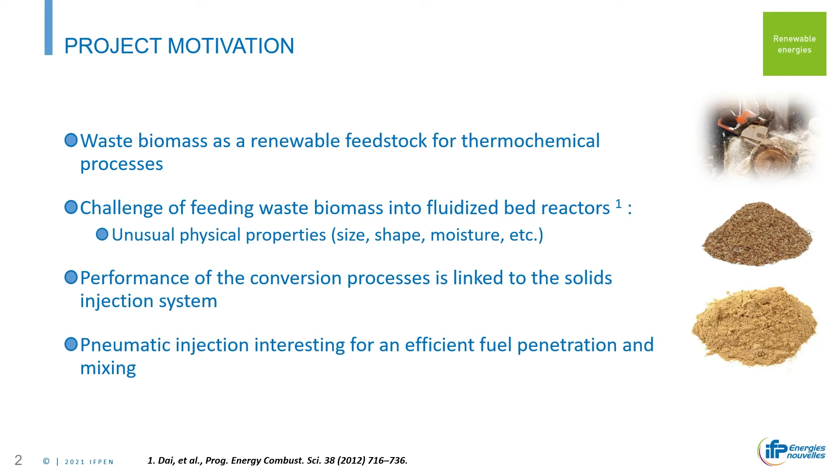For those of you who were here for the talk by Carl Jacob on pneumatic injection, that's an interesting way to inject biomass into fluidized beds. That was the motivation, and for that we built a pressurized pulsed feeder for pneumatic injection of a batch of biomass. This is of specific importance for studies where, for example, we want to do kinetic studies of combustion, gasification, or pyrolysis of biomass, and we need to inject just a batch of particles inside the unit in an efficient way.

Or when we do hydrodynamic studies in cold flow models, where we also need a tracer that we want to inject into the reactor in a batch mode. So we studied this for doing a hydrodynamic characterization of this kind of transport - pneumatic injection of batch biomass into the reactors.

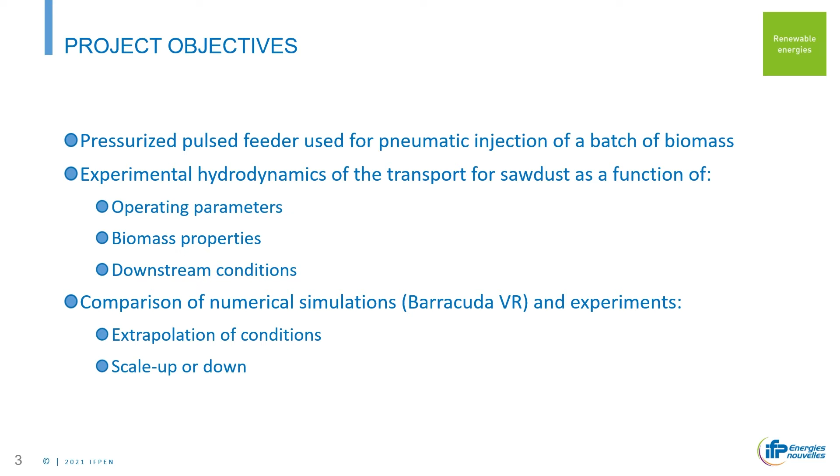We did some experimental hydrodynamics as part of the transport, and then we also did penetration studies. I'm just going to focus on the transport of this biomass; the penetration I may show in the future. So in this presentation, I'll first talk about the experimental part - how the transport of this sawdust is related to the operating parameters, biomass properties, and downstream conditions: is it a fixed or fluidized bed, or just an empty bed? Then the part I really like is the comparison between numerical and experimental results, and how we use these numerical simulations in Barracuda for extrapolation to other conditions, or scale-up or scale-down.

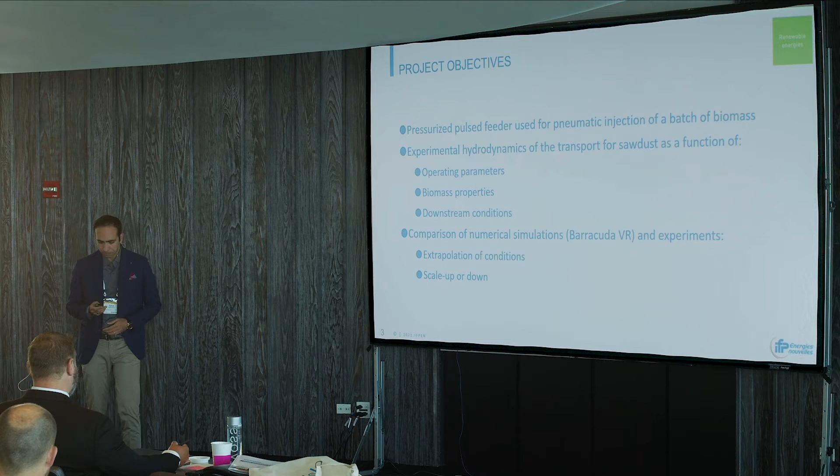We insert a certain amount of biomass, indicated by this packed bed with mass M. We use pressure to pressurize this part. Once we open the ball valve, the pressure built up here pushes this biomass into the main column, and we could also use secondary air injection. We placed a fast camera in this region to see the dynamics of the transport, and also to measure the time the biomass needs to get through.

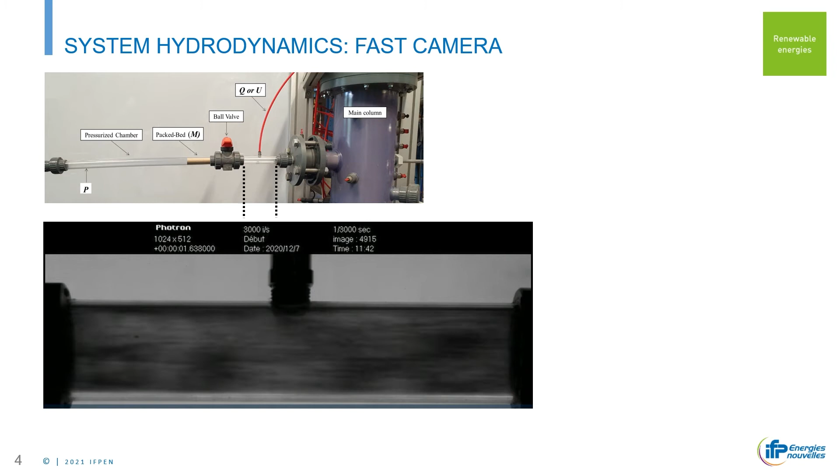Here's the video that we captured at 3,000 frames per second. You can see we've depicted different phenomena of this transport: a very dilute region, then more dense regions with some voids in them, and then a big plug of solids being transported here - that's where most of the biomass is actually being transported to the unit. The pressure initially accelerates the particles, but then there's a tail of particles that remain.

We can see the particles start decelerating here because the pressure is actually being balanced throughout the entire line. At a certain point, as you can see here, there are just a few particles remaining in the injection line. By considering this phenomena and doing some image analysis with our postdoc researcher, we were able to understand the time it took for the biomass to actually be transported and injected into the unit.

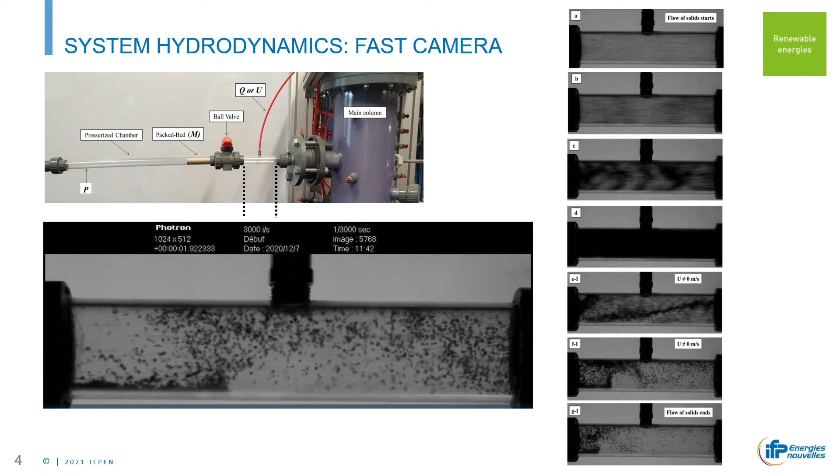And to get the solid mass flux, as you can see here, at a certain point, once the driving force is completely dissipated, the particles start doing some recirculation. At this point, we considered the transport finished, and we measured the remaining amount of biomass that was negligible, less than 1% of the initial mass.

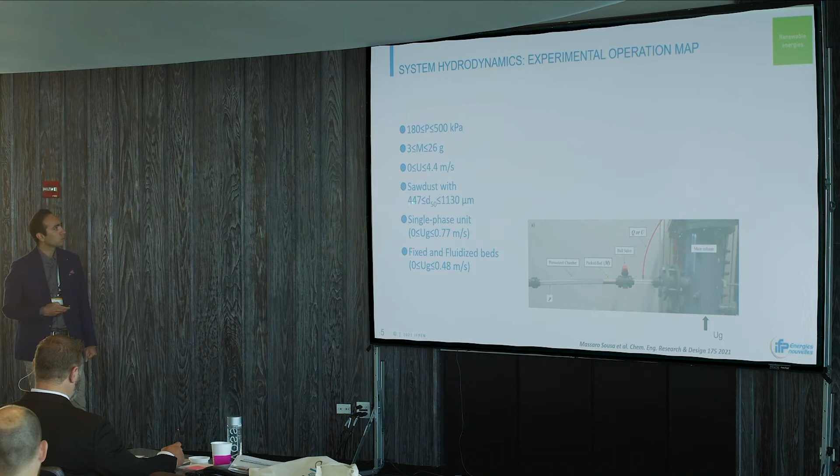So we did this, and then we started studying the experimental part with different operating conditions. We operated this chamber with pressures between 180 and 500 kilopascal, different masses of particles. We used or not the superficial gas velocity for the secondary injection to enhance the injection. We used different kinds of sawdust with D50 between 447 micron and 1,130 micron. We injected the biomass into a single phase unit just with air, or a fixed and fluidized bed with different superficial gas velocities.

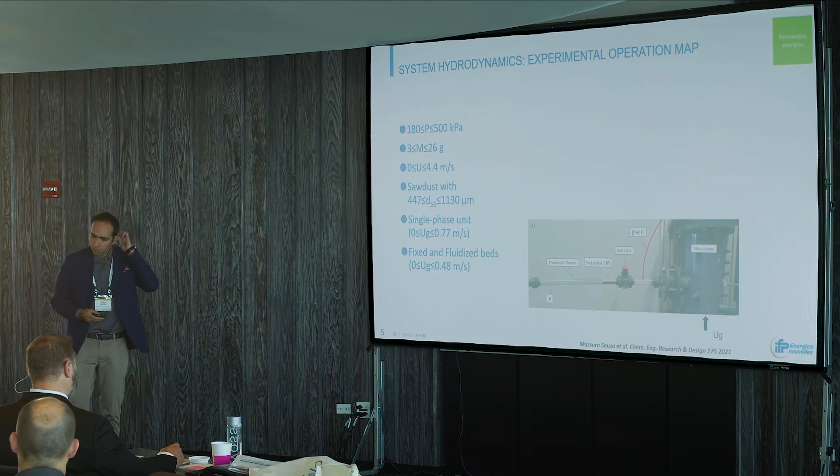This was done, and we published these dynamics in terms of hydrodynamics in this paper. We wanted to see, in all these operating conditions, what the operation map is. So what we've done here is to see this solid mass flux as a function of the amount of pressurized gas that we have. This VA that I'm showing here is an adimensional volume of pressurized gas that we use in this chamber.

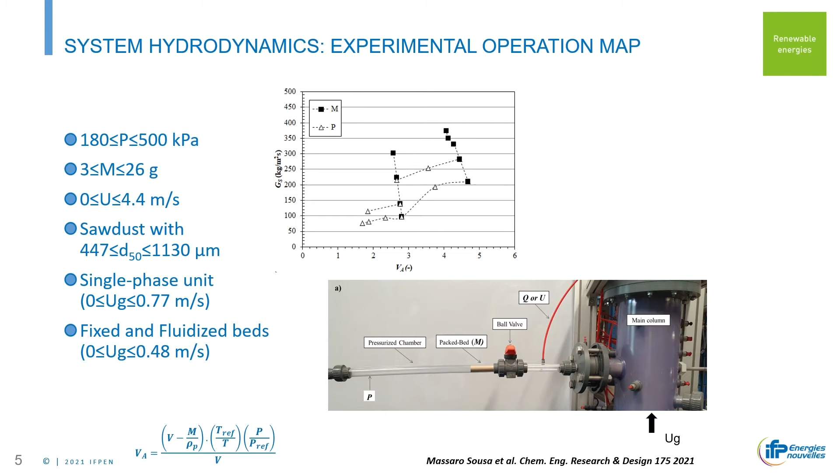Okay, so we can actually decrease or increase the solid mass flux in this unit by increasing the mass of solid inside this chamber. When we increase the mass of solid, the transport becomes a more dense transport, so the mass flux is higher. Or we can increase the pressure used for the transportation, which also increases the solid mass flux. So we came up with what we call the operation map with all these conditions.

We have several experiments that we have done at IFP, and there was the operation map where this feeder could be operated. That is region 1 that I'm showing here. The other regions, 2, 3, and 4, we could not operate.

The operation was jeopardized. In region 2, we could actually work, but for going to these high solid mass fluxes, we needed higher pressure, and we could not do it with this experimental rig. If the experimental rig was capable of higher pressures, we could actually go there. But in regions 3 and 4, we could not operate.

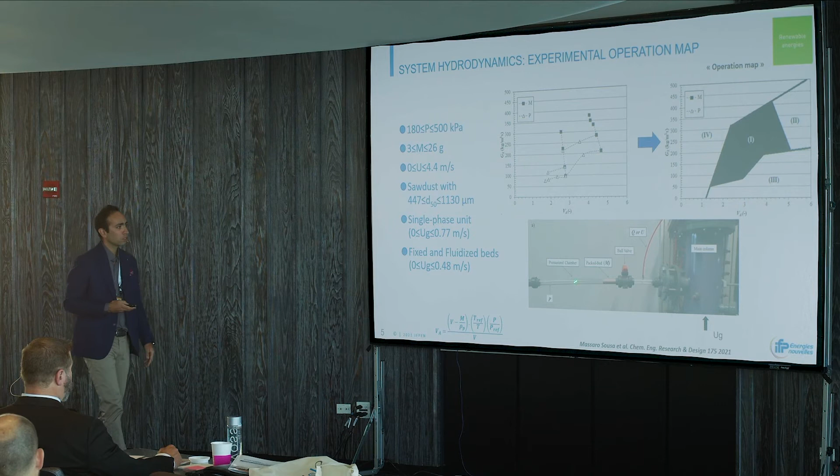In region 3, for decreasing the solid mass flux to that region, we needed a very tiny amount of biomass that was not feasible — it was very small, so experimentally it was not easy to transport. Region 4 was the opposite: it needed a very large amount of biomass in the system, and we know that when this piles up a lot, the interlocking between the particles doesn't let the pressure push them in, and transport was not possible. So once we did this, that was just the operation map.

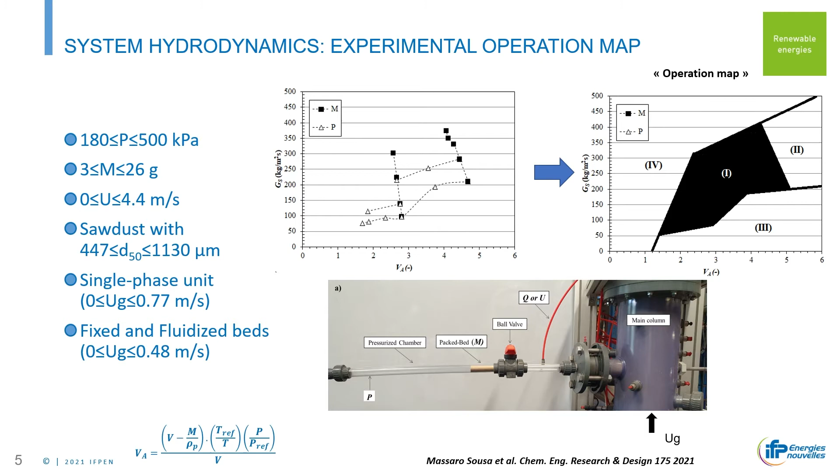We also studied and did some calibration to see how the transport works. Then we came to Barracuda and said, okay, let's see how the experiments compare with simulations.

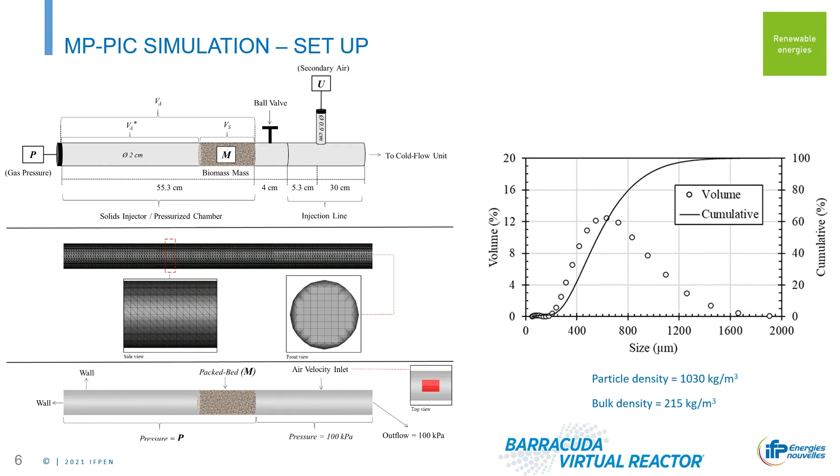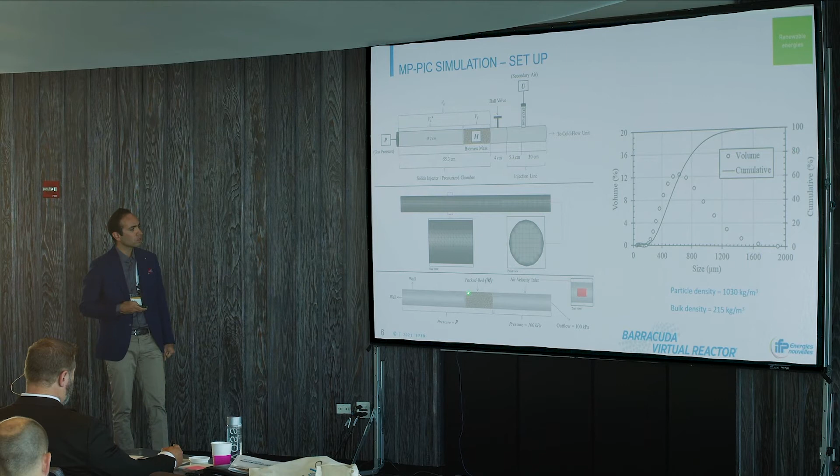So we did exactly the same, almost the same conditions that we had here. The only difference was the secondary air injection, which we put as a boundary condition, but the pressure, the pressure outlet, the amount of solid that we put for these physical properties was completely the same. So once we started, we chose this experimental condition that I'm showing here, and we started doing some mesh refining and selection of the different parameters. The first one was mesh refining.

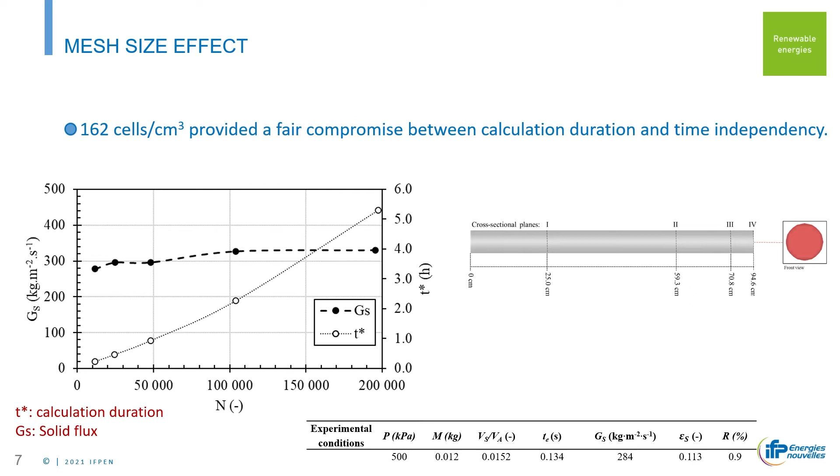Here I'm showing how by increasing the number of cells, the calculation time increases, but we were also interested to see if there is time independency of the solid mass flux. We chose 162 cells per cubic centimeter as the cell dimension in this region, which was a good compromise between calculation duration and time independency. We didn't want to refine it too much because we wanted to use the simulations for bigger scales too, and for bigger scales we wanted the cell size to not be very different from the smaller scale. So that's why we chose this, and started working on it.

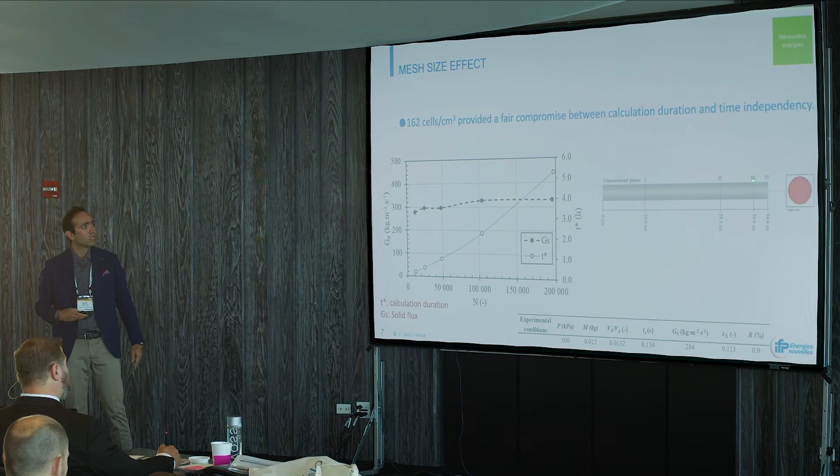The region where the fast camera was located, we placed a flux plane there to measure the time that the biomass was being injected, and also calculated it with the simulation. So that was where we could compare the time of passage from experiments to simulations.

Once we chose our cell size, we went to the main parameters that we usually use for tuning and verification of our model: the drag and particle-to-wall collision model.

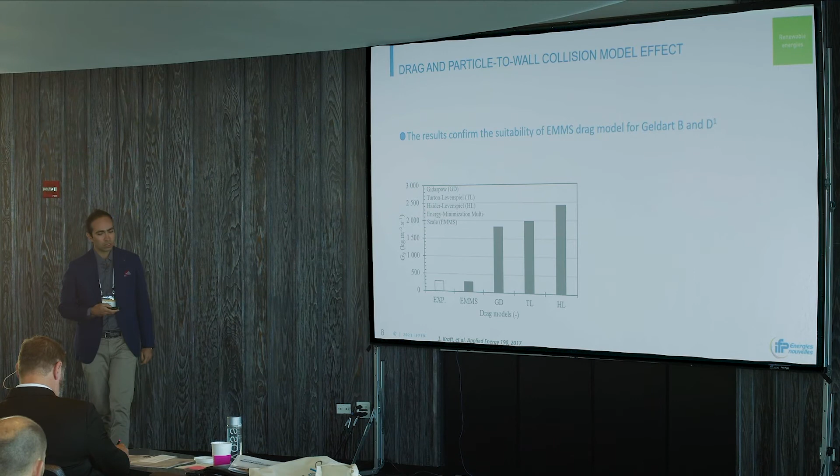For the drag, we used 4 different drag models: the Gidaspow model, Wen-Yu Ergun, Turton-Levenspiel, Haider-Levenspiel, and EMMS. As shown in other papers, EMMS for Geldart B and D particles works better than the others, and we saw that the experimental solid flux compared very well with the EMMS drag model. So that was the drag model we chose.

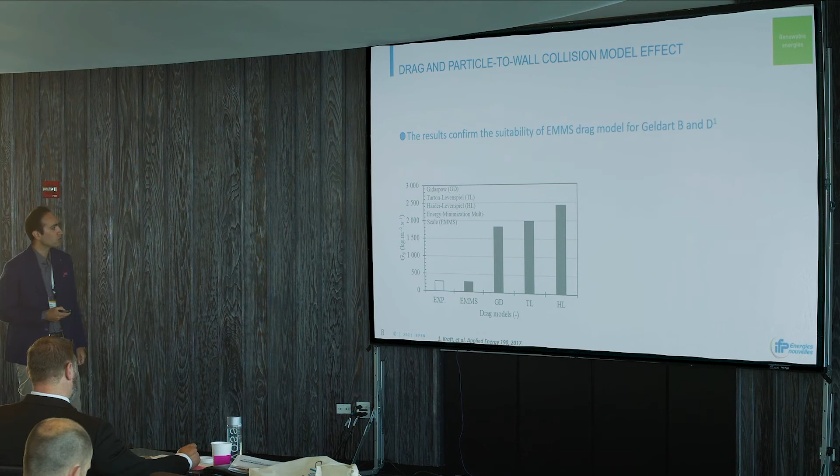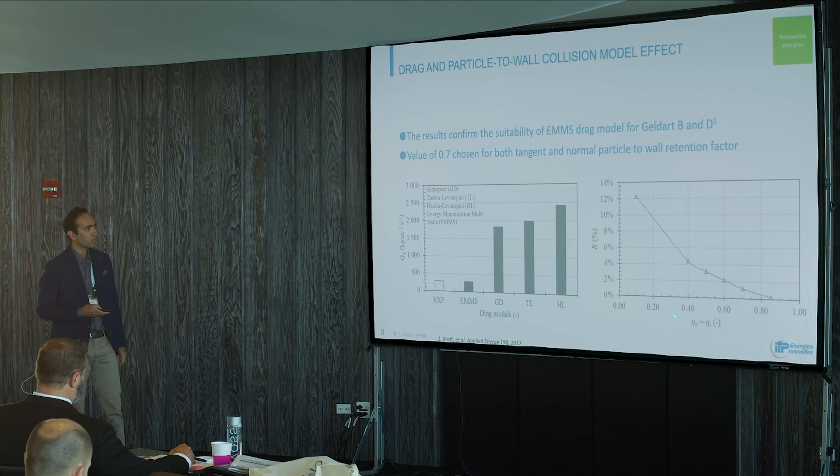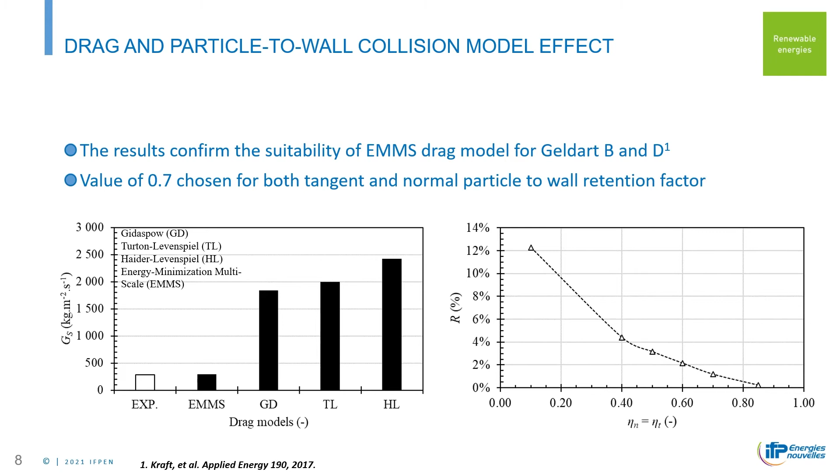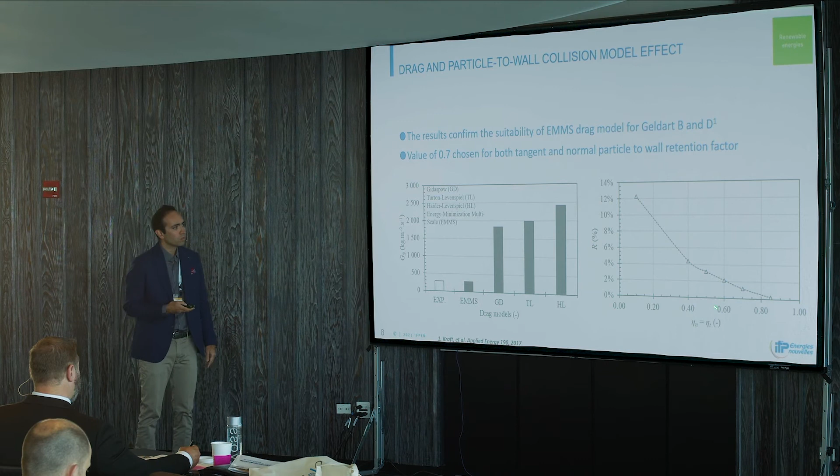Another parameter was the normal and tangential particle-to-wall retention factor, which we also wanted to optimize. This R is the percentage of solid that remains in the injection chamber once all the biomass is transported. Experimentally, we saw 0.9% of the initial amount remaining. When we decrease this parameter, it means we increase the friction between the wall and the particle, so more solid remains inside the unit. We chose a value of 0.7 that gave us satisfactory results.

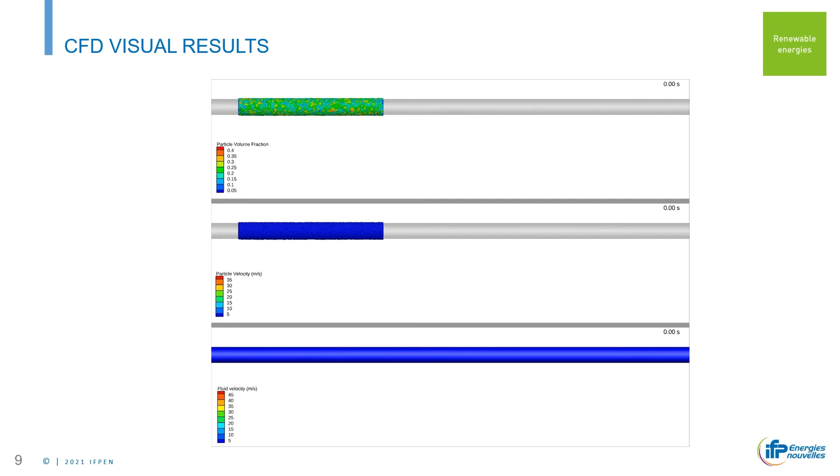Now let's look at the dynamics. This is similar to the fast camera footage I showed, but I'm going to show the transient contours of the CFD here. We have the continuous region colored by pressure, and the particles colored by their velocity. You can see the time scale is quite fast, between 0 and 0.3 seconds.

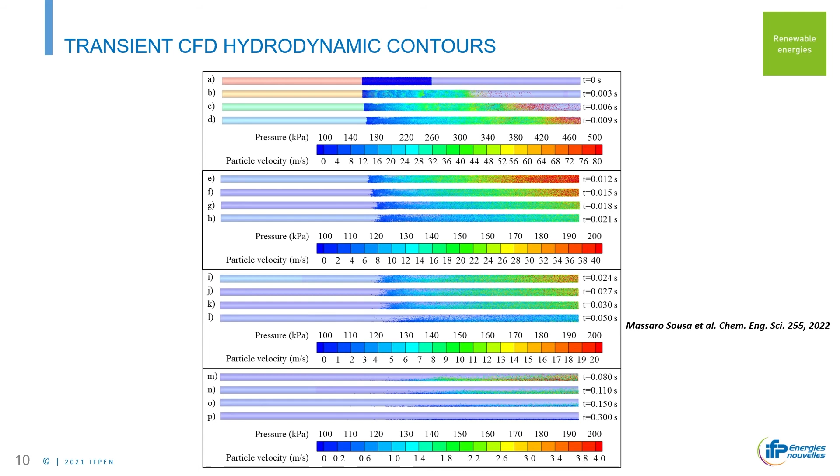We have most of the particles being pushed into the unit. At the beginning we have 500 kilopascal here, particles are not moving. The particles start getting accelerated here, and you can see the scale is 80 meters per second, so they're moving very fast. But at this time, the particles start decelerating because the pressure is getting much lower, and you can see the pressure scale is also decreasing.

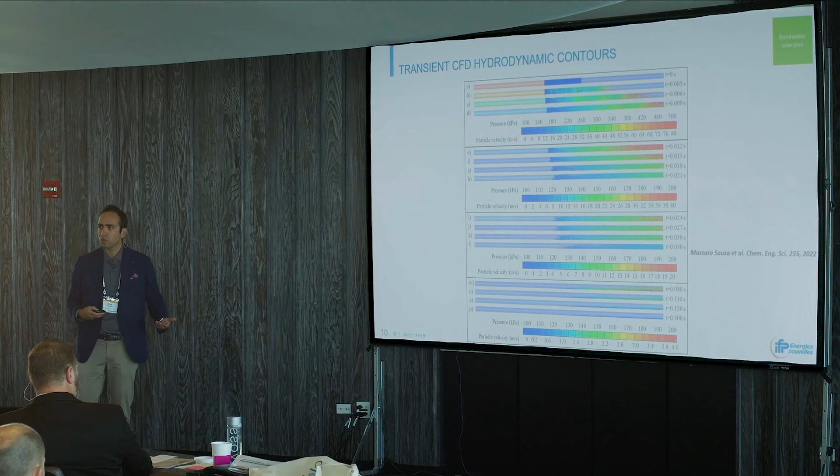We go down to 40, 200 here, and at the end we can see that when most of the particles are pushed out, there are just a little bit of particles remaining in the unit, and that's the remaining part that we measured and considered for comparison. We published this recently in Chemical Engineering Science.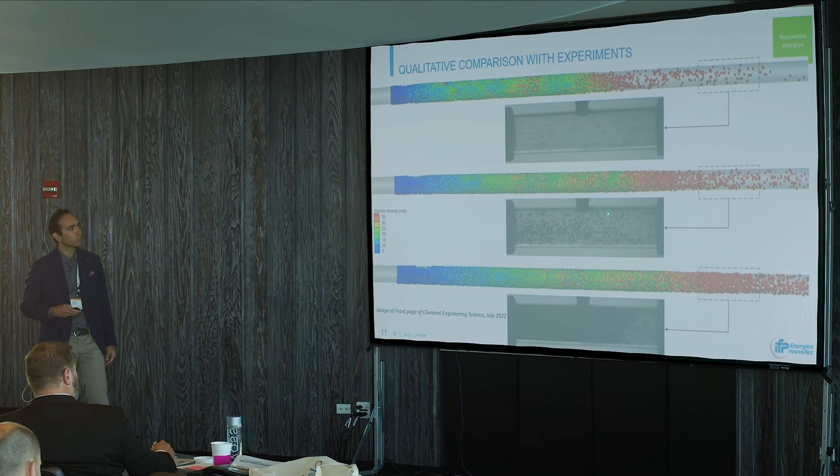We had a very dilute region at the beginning with just the pressure release, and the highest amount of pressure on the left, but then it's very dilute here, and just dense here. We were so pleased that this picture was actually used for the front page of Chemical Engineering Science for the July volume.

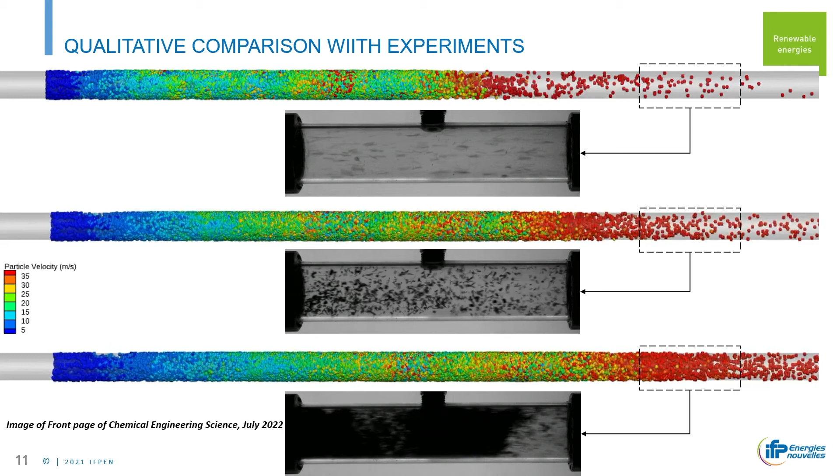So we were quite happy with the results in this paper. But then we went to the quantitative comparison.

In this slide, I'm showing solid mass flux as a function of the ratio between the volume of solid to the volume of pressurized air. We can change this value by decreasing the pressure, decreasing the solid flux, increasing the mass, increasing again the solid flux, and so on, or increasing both mass and pressure to increase the solid flux.

Doing the experiment, between experiments and simulation we saw very good comparison for most conditions. I want to remind you that we tuned the simulations only for this condition here. The other ones are all extrapolated, and that was very, very encouraging.

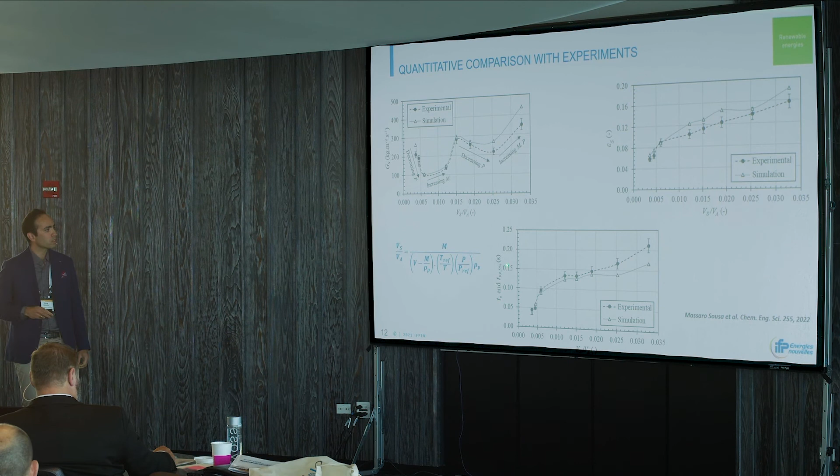Also, the concentration of solid inside the injection was between experiments and simulation in quite fair agreement, and also the time of passage of biomass was between experiments and simulation quite well in agreement. So that was quite encouraging.

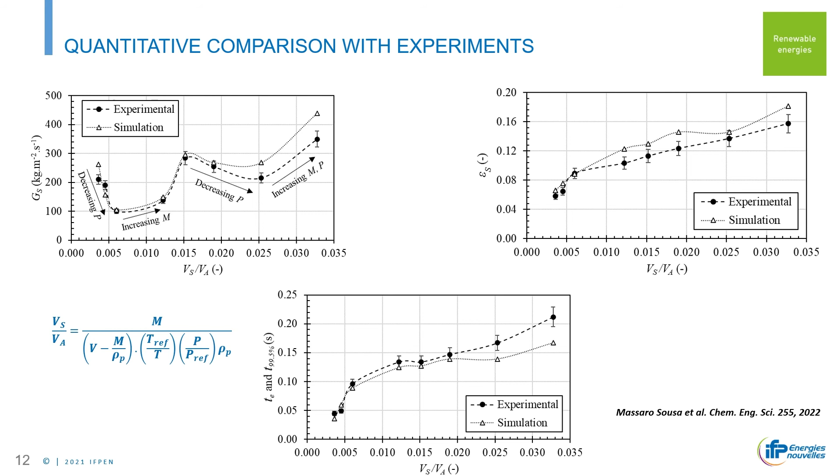So once we said, okay, the model is working well with the parameters that we have chosen, now we can use it to go somewhere that the experiments could not actually work. So we said, let's extrapolate it to conditions that we could not use experimentally.

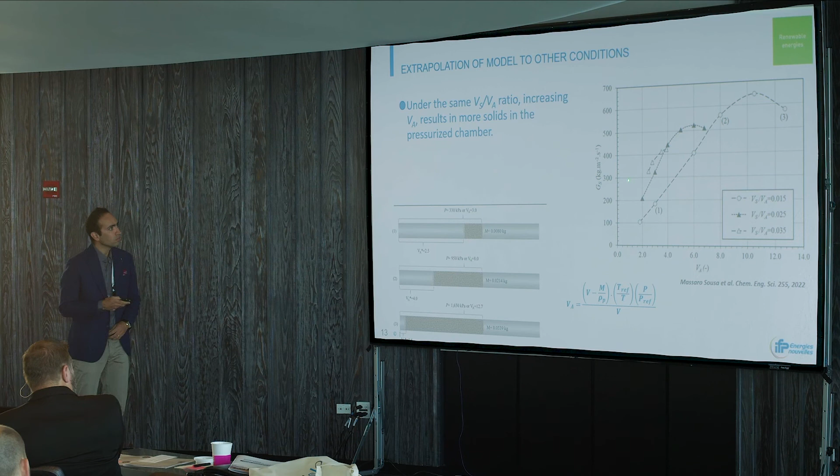So here I'm showing the solid mass flux as a function of the amount of gas that we have in the unit for different ratios of solid to gas. First of all, we could see that increasing the amount of solid, just going vertically here, we increase the solid mass flux, and that's because the transport is denser.

But also we could see that at a certain point we had a maximum in the solid mass flux through the driving force, which was the amount of gas. We showed these three points here that correspond to these three images.

And these images, they speak for themselves. When we want to keep the ratio the same, we have to increase both the pressure and the mass, the amount of mass that we have.

Up to this point, we have the increase of the solid mass flux, but at a certain point, the pressurized chamber is really full with solid, and this amount of pressurized gas on the left part of the chamber is not enough to push the solid. So that's actually what I was talking about when I said there is interlocking between the solids.

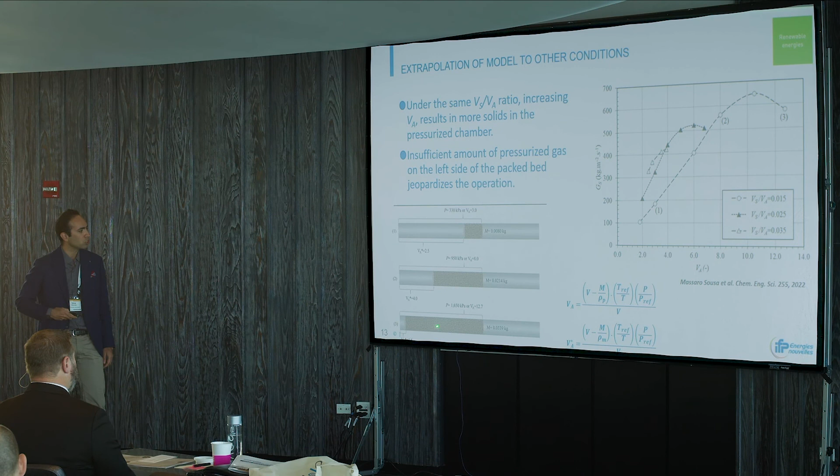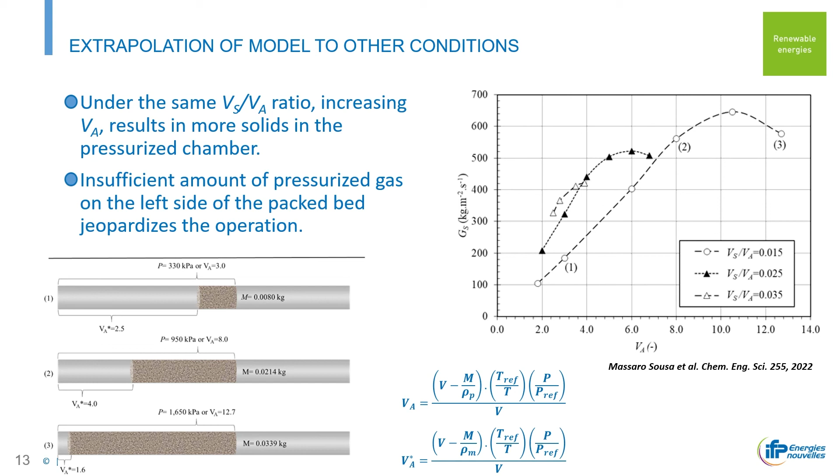Experimentally, this was observed for an amount of gas that we choose. We show it with this VA star, which is just the amount of gas here in the left region, not considering the interstitial gas. 1.6 was where we could not operate anymore. The solid was not being moved. That was seen by Barracuda, and it was also seen experimentally. The value we saw experimentally was not 1.6 but 1.4, but we were very happy also with this phenomenon.

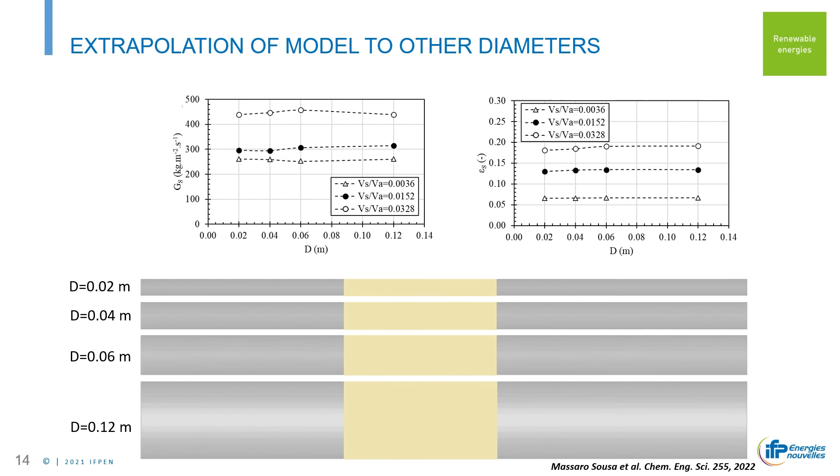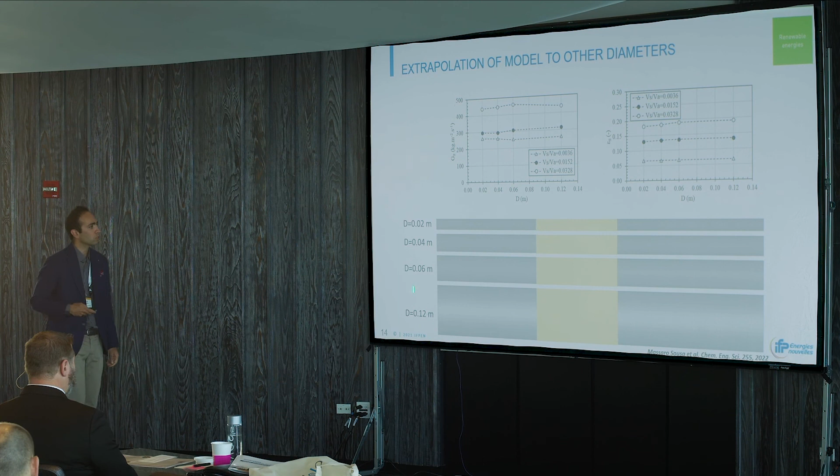We also extrapolated to other diameters with the same operating conditions. We just changed the diameter of the injection from 2 centimeters to 12 centimeters, and saw very nice and robust operating conditions between different diameters. The solid mass flux for the same conditions of VS on VA was actually being obtained, so this injector can be scaled up to higher diameters.

We are now working also on smaller diameters because it's of interest for our lab units.

Just to conclude, the hydrodynamics of the pressurized feeder was characterized experimentally. MP-PIC was tested and compared with selected experiments, and then by using the drag law and particle wall interactions that we tuned, we used the model to study the feeder hydrodynamics in other operating conditions. The feeder performance was maintained for injectors with a larger diameter than 0.02.

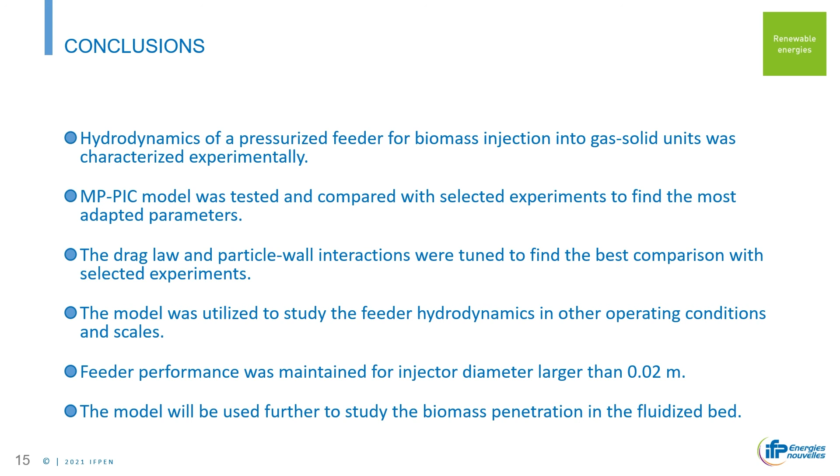And the model will be used further to study the biomass penetration in the fluidized bed. That's what we are working on right now.